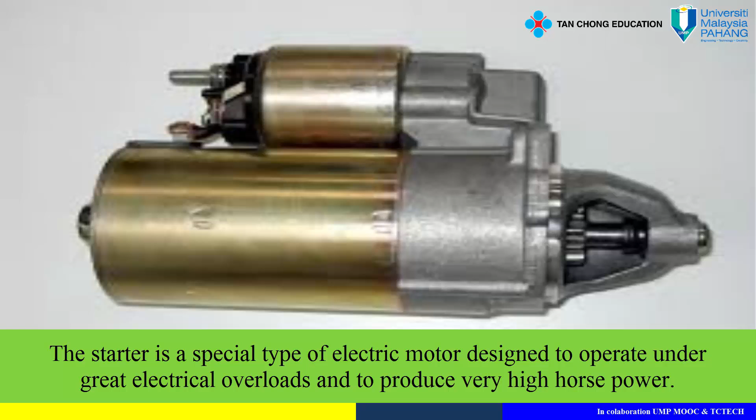Starting system: the starter motor. The starter motor converts the electrical energy from the battery into mechanical energy for cranking the engine. The starter is a special type of electric motor designed to operate under great electrical overloads and to produce very high horsepower. Because of these design features, the starter can only operate for short periods of time without rest. The high current needed to operate the starter creates considerable heat, and continuous operation for any length of time causes serious heat damage to the unit.

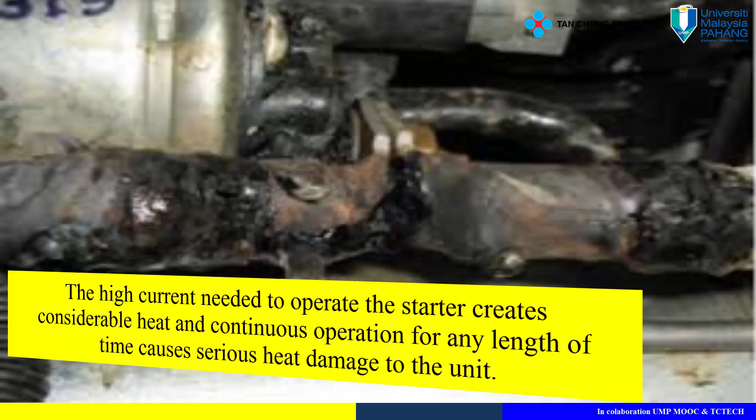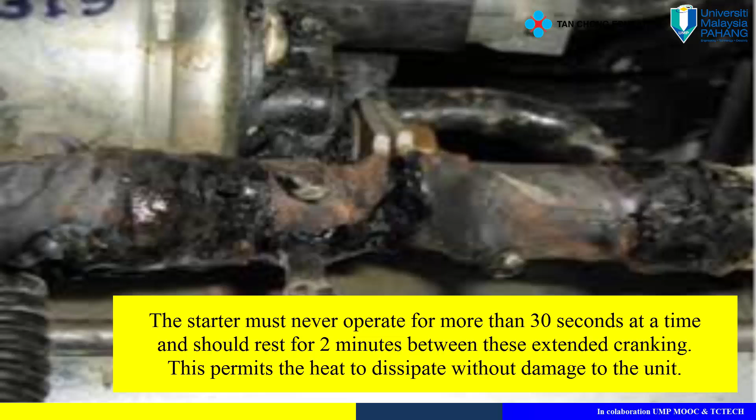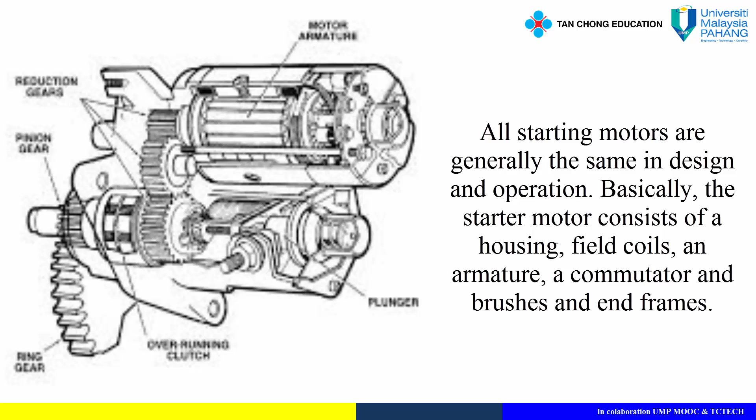The starter must never operate for more than 30 seconds at a time, and should rest for 2 minutes between extended cranking attempts. This permits the heat to dissipate without damage to the unit. All starting motors are generally the same in design and operation. Basically, the starter motor consists of a housing, field coils, an armature, a commutator, brushes, and end frames.

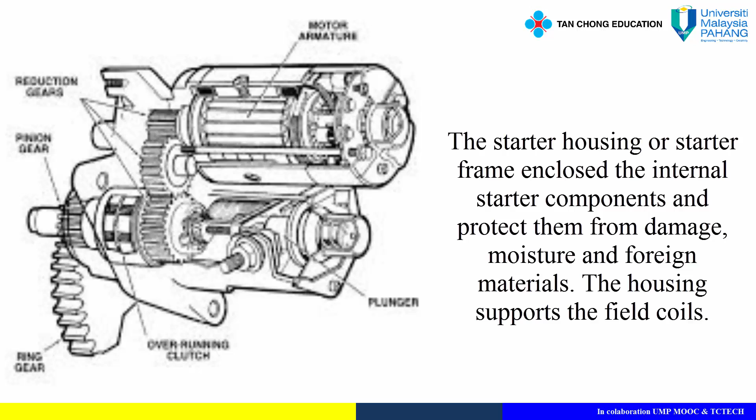The starter housing, or starter frame, encloses the internal starter components and protects them from damage, moisture, and foreign materials. The housing also supports the field coils.

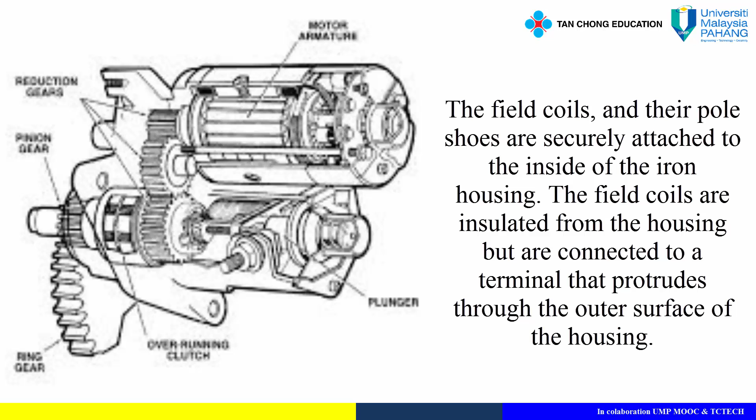The field coils and their pole shoes are securely attached to the inside of the iron housing. The field coils are insulated from the housing, but are connected to a terminal that protrudes through the outer surface of the housing. The field coils and pole shoes are designed to produce a strong stationary electromagnetic field within the starter body as current is passed through the starter.

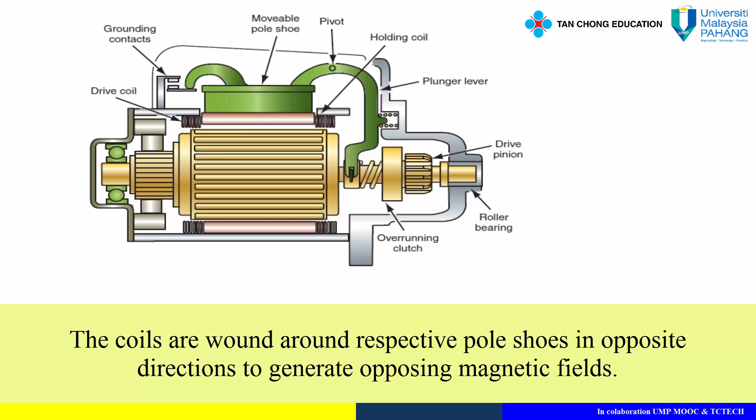These magnetic fields are concentrated at the pole shoe. Fields have an N or S magnetic polarity, depending on the direction of current flow. The coils are wound around respective pole shoes in opposite directions to generate opposing magnetic fields. The field coils connect in series with the armature winding through the starter brushes. This design permits all current passing through the field coil circuit to also pass through the armature windings.

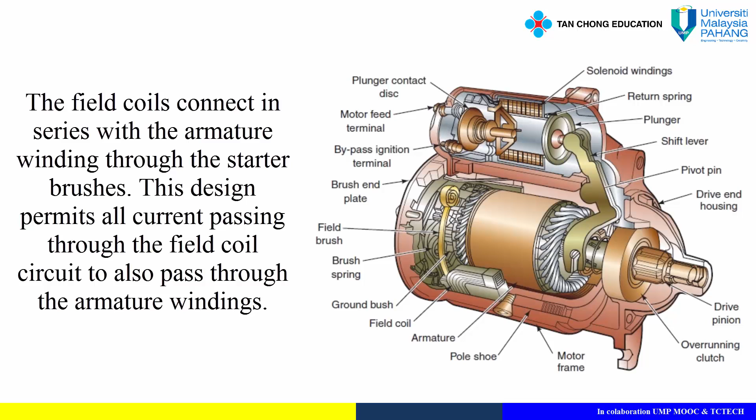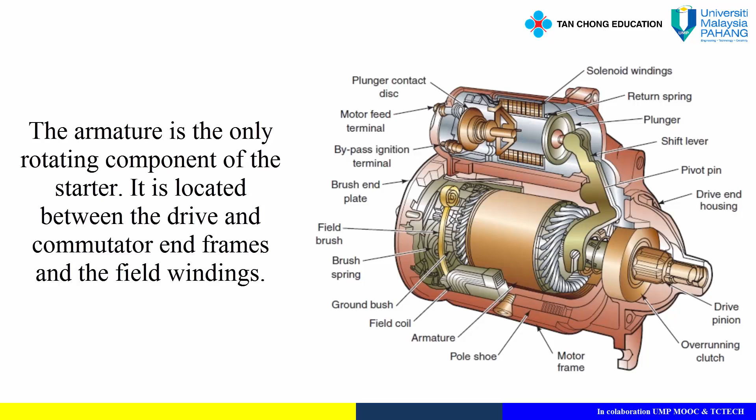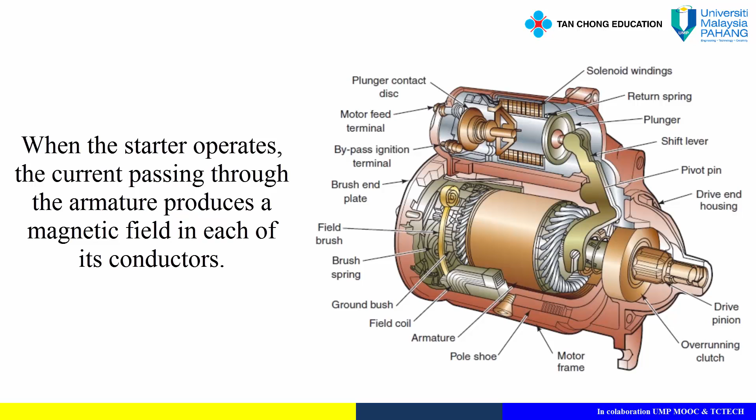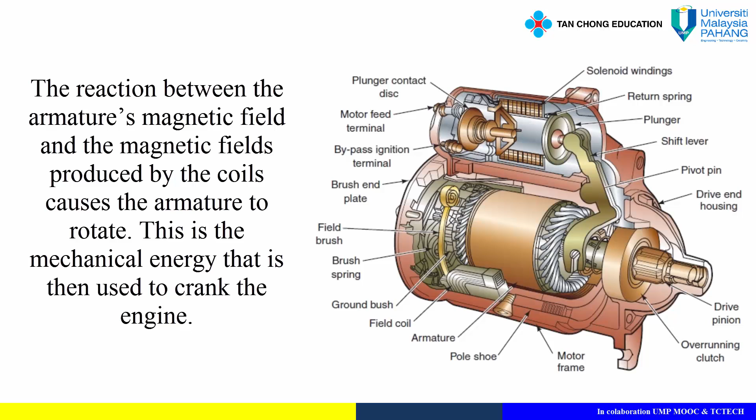The armature is the only rotating component of the starter. It is located between the drive and commutator end frames and the field windings. When the starter operates, the current passing through the armature produces a magnetic field in each of its conductors. The reaction between the armature's magnetic field and the magnetic fields produced by the coils causes the armature to rotate. This is the mechanical energy that is then used to crank the engine.

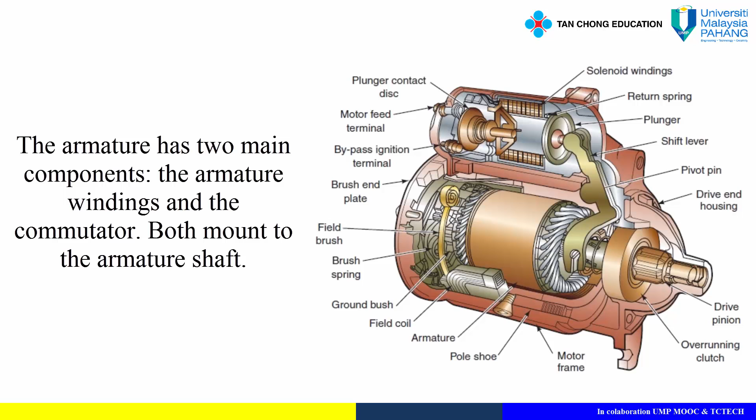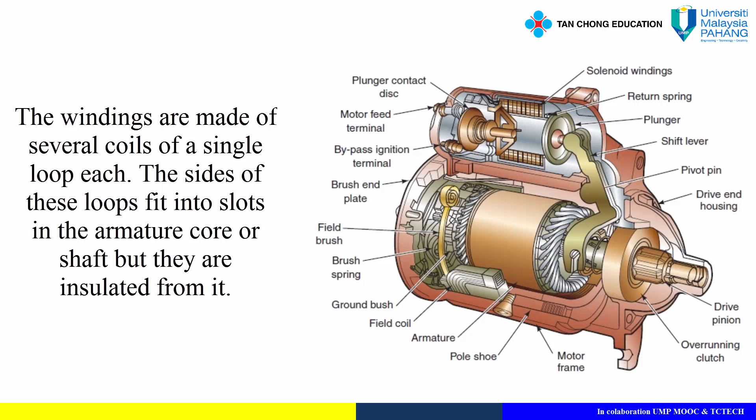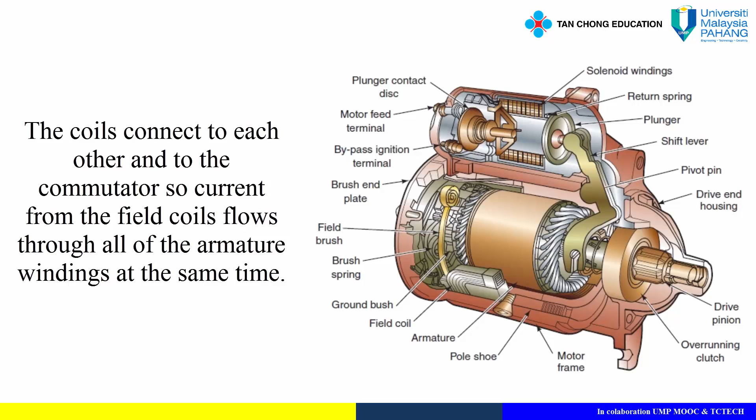The armature has two main components: the armature windings and the commutator. Both mount to the armature shaft. The windings are made of several coils of a single loop each. The sides of these loops fit into slots in the armature core, or shaft, but they are insulated from it. The coils connect to each other, and to the commutator, so current from the field coils flows through all of the armature windings at the same time.

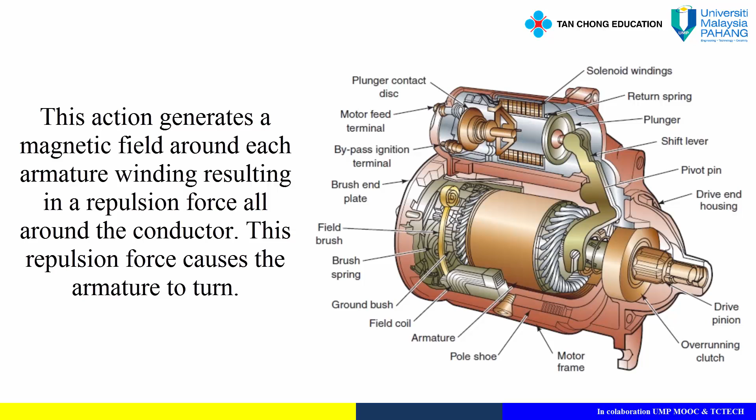This action generates a magnetic field around each armature winding, resulting in a repulsion force all around the conductor. This repulsion force causes the armature to turn. The commutator assembly is made up of heavy copper segments, separated from each other and the armature shaft by insulation. The commutator segments connect to the ends of the armature windings.

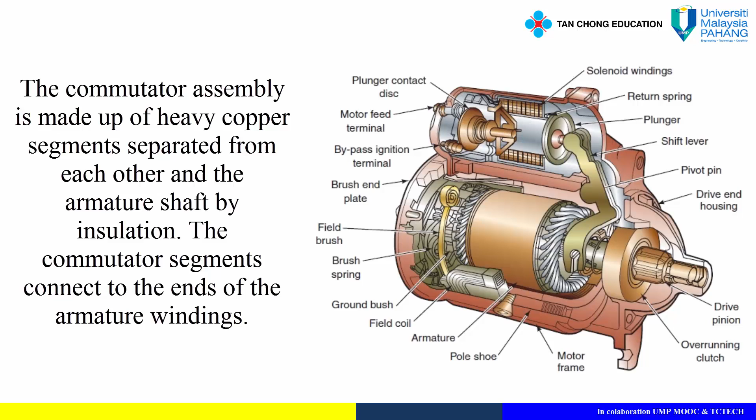Most starter motors have 2 to 6 brushes that ride on the commutator segments, and carry the heavy current flow from the stationary field coils to the rotating armature windings, via the commutator segments.

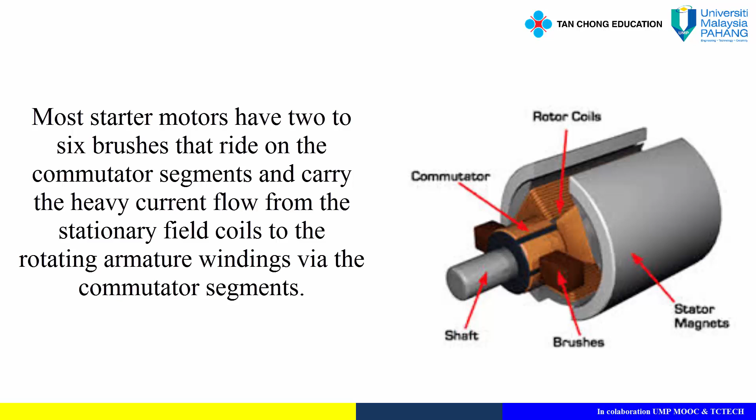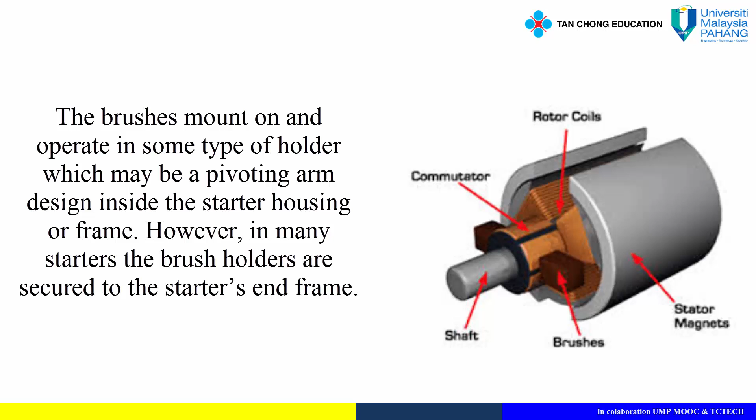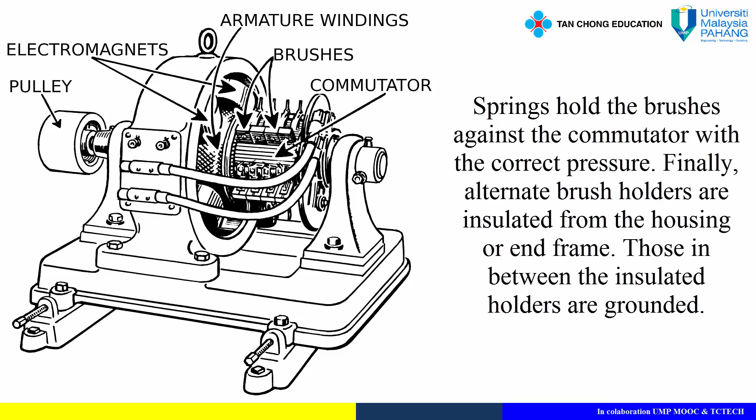The brushes mount on, and operate in, some type of holder, which may be a pivoting arm design inside the starter housing or frame. However, in many starters, the brush holders are secured to the starter's end frame. Springs hold the brushes against the commutator with the correct pressure. Finally, alternate brush holders are insulated from the housing or end frame. Those in between the insulated holders are grounded.

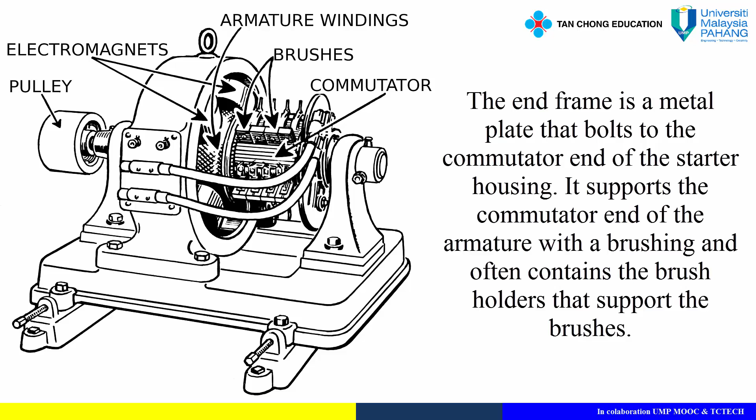The end frame is a metal plate that bolts to the commutator end of the starter housing. It supports the commutator end of the armature with a bushing, and often contains the brush holders that support the brushes.